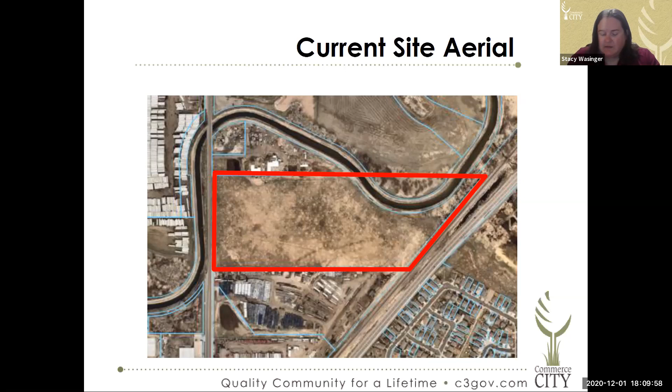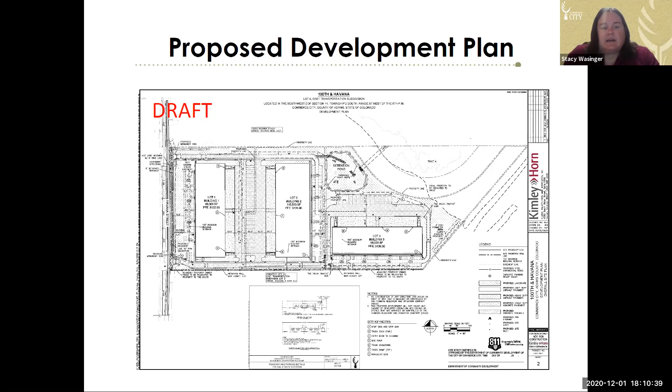So next slide, please.

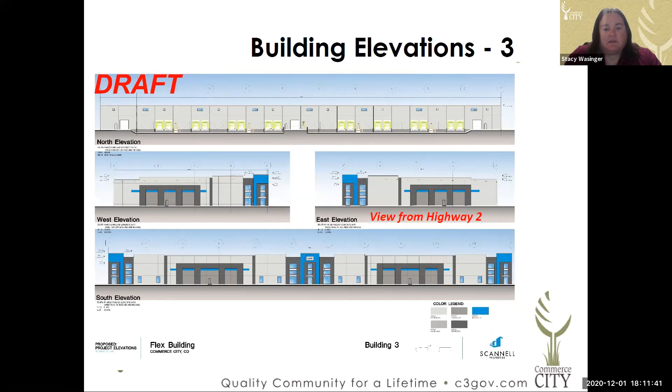And then this is the proposed building 3, and that middle right-hand elevation is the side of the building that would be the east elevation facing Highway 2. Next slide, please.

Based on the DRT analysis, the DRT believes the rezoning is justified to remove the conditions, as well as to rezone that portion to public. Similar conditions were common at the time, but current development processes and standards are more robust than they were in 1995. With the current LDC and development plan process, some of those conditions are a little redundant and create more uncertainty on the developer side by extending that process through planning commission and city council rather than an administrative review.

In those four conditions, as mentioned earlier, the first one deals with a buffer that's part of the lot 1 and 2 development. Lot 4 will be required to meet LDC requirements for landscaping and buffering, which are fairly robust.

Conditions 2 and 3 require planning commission and city council to review and approve the initial development plan, and then any changes to it, which just adds additional time when we have a very robust development plan review process that can ensure all LDC and I2 requirements are met.

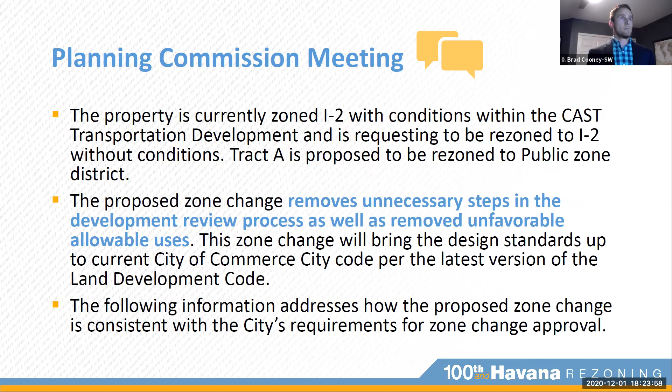Consistency with the comprehensive plan: future land use for the area, as Stacy mentioned, is industrial, which is consistent with the proposed use. Future land use for Tract A is shown as park. We are not proposing any development on Tract A as part of this project, and we'll be dedicating it as public space. Next slide.

Compatibility with surrounding land uses: as the vicinity map showed, the majority of the developments on the south and west side are industrial. To the north is the First Creek Dog Park, which is compatible and aligns with Tract A being dedicated as public, with future land use as park. Next slide, please.

There are no negative impacts to public services, including water, sewer, storm, and streets. Industrial developments such as this are typically low water users and thus generate low sewer flows. Stormwater will be in compliance with Commerce City and Mile High Flood District standards. As part of this development, a public improvement agreement is required, including improvements to existing Havana Street.

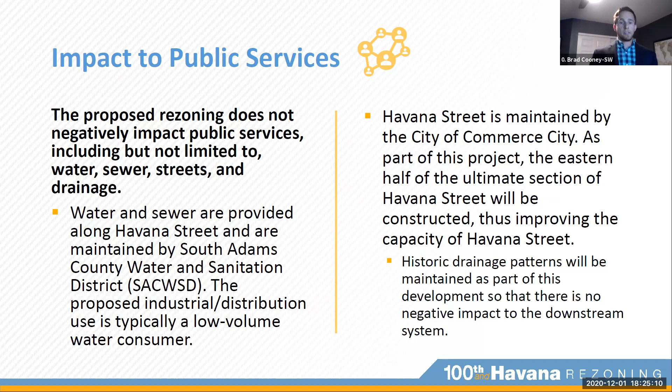There are no negative impacts to public uses, including parks, schools, and open space. Dedicating Tract A as public zone actually enhances the existing First Creek Dog Park.

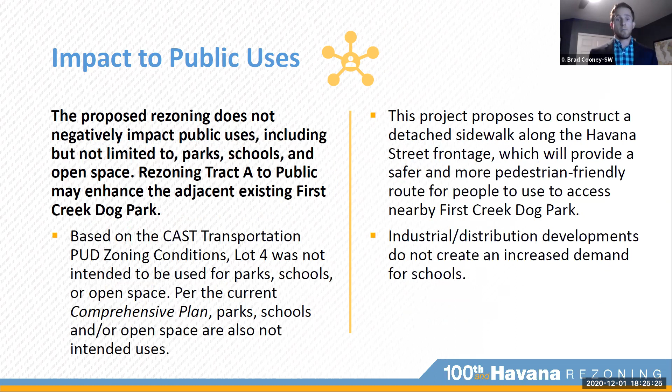Community compatibility: as previously discussed, this development is compatible with surrounding land uses and benefits the community by removing undesirable allowable uses from the CAST Transportation zoning conditions. Ultimately, this development is in the public's interest. Rezoning to I2 without conditions also simplifies the development process and aligns with the comprehensive plan and future land use.

And this basically just sums up all the points that we had previously made. So at this time, I'd like to open up the floor for any questions.

Brad, what was your thought process in your overall development scheme to accommodate the O'Brien Canal? The thought process was understanding that there are no impacts. We're not allowed to develop near the O'Brien Canal or up against it. Understanding that FRICO has specific requirements that we'll need to meet, so trying to best make the site work while still keeping the O'Brien Canal active and not negatively impacting it.

Was there quite a bit of discussions with them, or did you just follow their design guidelines? Oh no, quite a bit of discussions, and these discussions have been going on for the better part of 8 to 10 months at this point. Okay, yeah, we kind of figured that would probably be the case.

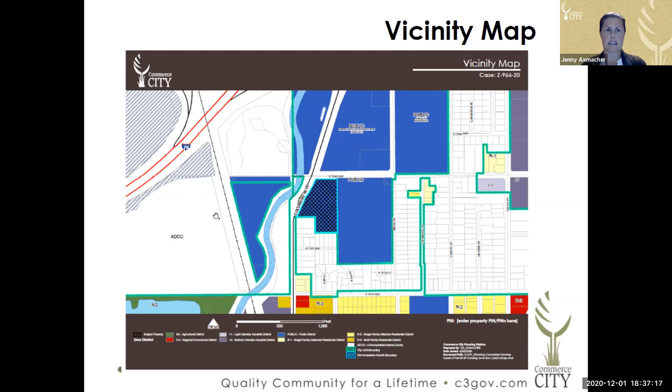Thank you very much. Good evening, Mr. Chairman and members of the Planning Commission. I'm excited to present case Z-966-20 to you. The address is 7190 Colorado Boulevard. The applicant is the Urban Land Conservancy, and the request is to rezone the site from public to PUD, planned unit development. The site is located at 72nd Avenue and Colorado Boulevard, with 72nd Avenue to the north and Colorado Boulevard to the west. In the surrounding area, to the north we have an Adams County service building, home of the Adams County Communications Services Center and a sheriff's substation, zoned public. To the east, we have the Alsup Elementary site, zoned public. To the south, we have unincorporated residential properties in Adams County. And to the west, it's exciting to point out we have the newly opened RTD 72nd Avenue N Line station, also zoned public. The comprehensive plan for this site designates it mixed use, corridor, and commercial. There's also a station area master plan that has been done for this area adjacent to the transit center.

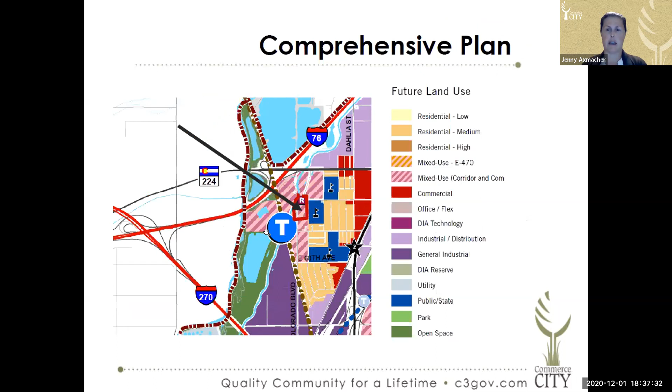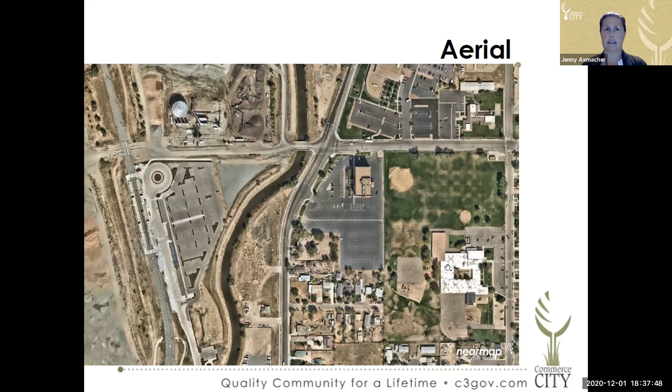So here's an aerial of the site. It's currently developed, the former home of the Adams County Human Services building that was recently relocated. It's developed with parking. Here's the station I mentioned just to the west, the Alsop Elementary site, and the Adams County site to the north.

The history for the site: it was rezoned to Public in 1989, and was the former site of the Human Services location. So the request tonight is to rezone this site from Public to PUD to allow for a wider variety of uses in support of transit-oriented development.

They're proposing two planning areas within this PUD, Planning Area A and Planning Area B. Within Planning Area A is the existing office building. They're proposing changes to the zoning that would allow more varied office and commercial uses, including those uses permissible in the C2 General Commercial Zone District, in addition to those already allowed in the Public Zone District.

For Planning Area B, they're allowing a more dense multifamily residential use, 60 dwelling units total, based on the R3 Zone District. The density is greater than what would be allowed in the R3 Zone District, and it also allows for accessory commercial uses.

The DRT is supportive of this proposal and believes that the expansion of the allowed uses and increased residential density will allow the site to more appropriately take advantage of its proximity to the 72nd Avenue station.

So they're proposing some revised bulk standards as part of the PUD zone document, including an increase in building height for the residential development by 5 feet. We believe the station area master plan and transit-oriented development feel is supported by this, while the Public Zone District allows for 80-foot high buildings. The 55 feet that would be allowed in the residential portion of this site would actually be smaller than what would be allowed otherwise.

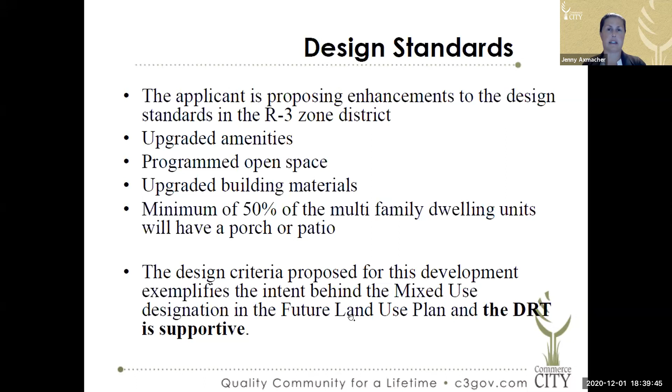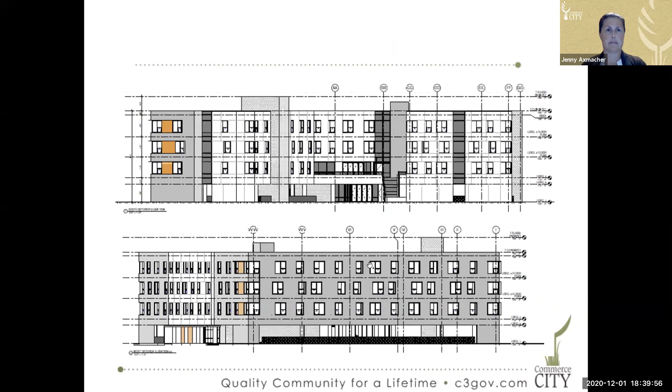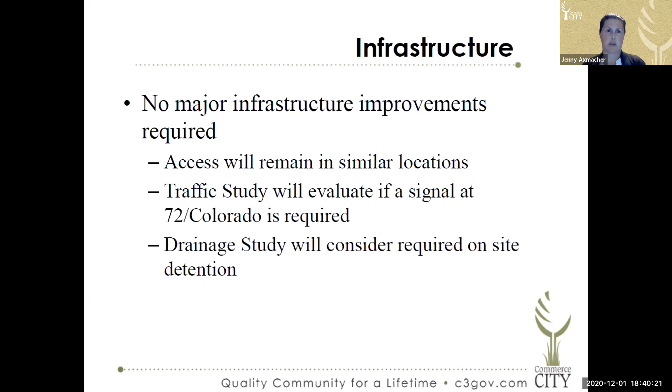So no major infrastructure improvements are anticipated. Access will remain in similar locations. The traffic study will evaluate if there are any additional requirements, considering whether a signal would be required at 72nd and Colorado Boulevard. It's important to note that Public Works did just complete some improvements along Colorado Boulevard in advance of that RTD station opening. And a drainage study for the project will consider whether any on-site detention will be required.

As of this date, staff has not received any inquiries from the public regarding this request. And while I neglected to include a slide, I can assure you that the notice requirements outlined in section 21-3285 were met. This property was posted, the notice was published, and the adjacent property owners were also notified.

So the DRT believes this case meets the approval criteria for rezoning to PUD, including compatibility with the future land use plan, both the comprehensive plan and the station area master plan, that it represents an improvement in quality over what could have been accomplished through strict application of the zoning code, and that it's compatible with the surrounding area. The DRT recommends that the Planning Commission vote to forward this request to council with a favorable recommendation.

With that, staff is happy to answer any questions, and then I'd be happy to introduce the applicant. Thanks, Jenny. Questions for Vice Chairman Amador?

So it looks like this is a 4-story building. And on that curve that's there, what does the traffic study say in terms of access and volume? Because I have a feeling there's going to be a lot of collisions and increased traffic going on here.

I believe the traffic study hasn't been finalized, but it will evaluate whether that access can remain in that same location or needs to be adjusted to prevent those issues. Okay, that helps. Thank you.

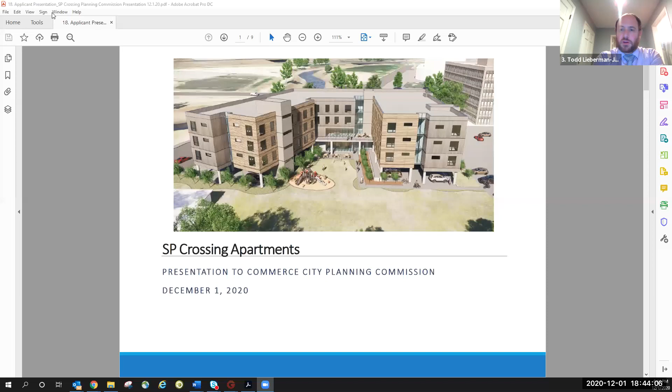Very excited about this project, streaming at you live from Kansas City. Brinshore Development is a national development company, and we are partnering on this development with Nesbitt Development, a local Colorado-based development company, in partnership with the Urban Land Conservancy. This development is a really exciting opportunity to build affordable housing near a transit station in Commerce City.

You can see a shot of the site, which includes a 4-story building with a podium of parking. So 4 total stories, one of which is parking, and also on the first floor is the lobby and some amenity space. There's a nice courtyard area with a playground, and the units will be priced at all sorts of different rents, from housing affordable to people under 30% of the area median income, all the way up to 80%, which is more or less market rate.

Parking is under the building, and there's some shared spaces adjacent to it, but we hope a lot of residents will use the RTD station nearby. We're working with a great architect locally and a great civil engineering firm on this, and are excited about moving this project forward.

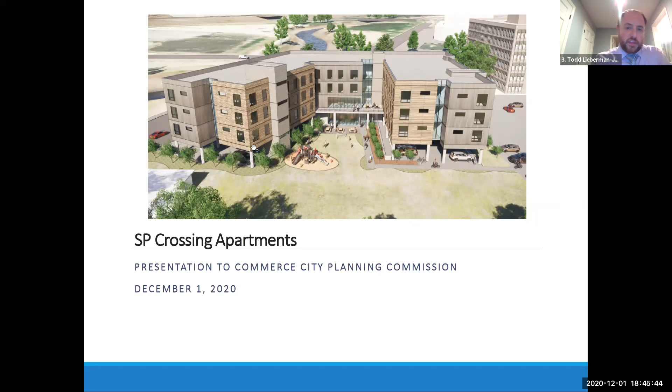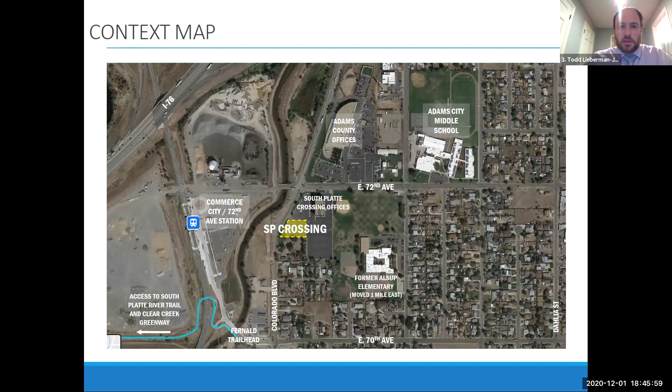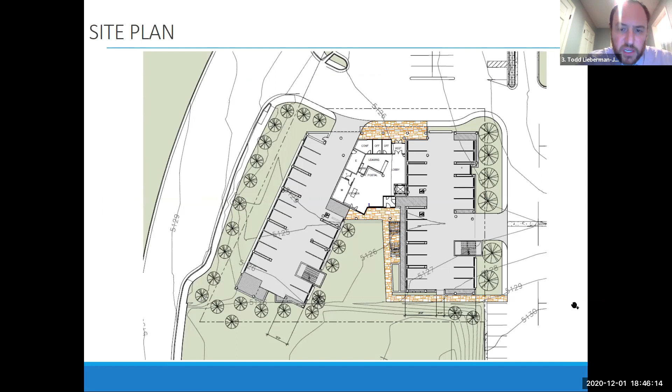This is the first floor plan, showing the parking as well as the amenity space and leasing office. There'll be a nice amenity space that goes up between the first and second floors.

Here's the shot you saw before, showing the amenity space opening up into the nice courtyard. Brinshore develops projects like this around the country. We currently have 2 developments in Denver, one a few blocks from the Capitol building called Capitol Square, which just broke ground, and Sheridan Station in the city of Denver. So this is our 3rd entree into the Denver region.

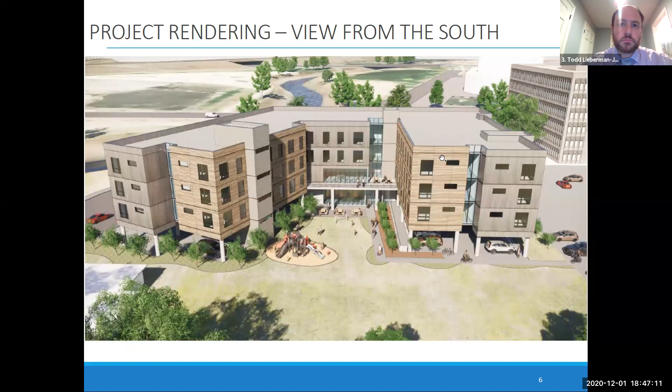We are joined today with our civil engineer and with the Urban Land Conservancy, who may have some additional points to add here. If not, thank you for your time, and we're available to answer questions.

Thank you, Mr. Lieberman. Questions from the commissioners? Thank you, Mr. Lieberman, no further questions, I think, from our side on that. We'd now like to open up our public comment portion of it.

I think we have Mr. Douglas registered as well. Mr. Douglas, questions? Yes, I have a few here.

I know parking was a concern. Looking at the picture of the development, how it faces to the south, there are 2 current residential properties now, 7110 Colorado and 7090 Colorado. Is there any way that land can be purchased, if they're willing sellers, for those lots next to said apartments? Because that's 4 stories high, that's a lot for that little residential lot.

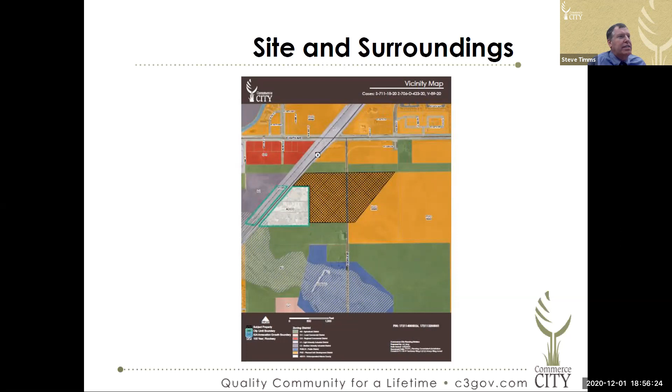The future land use plan here identified shows that area of orange, if you will. That's medium density residential in our plan.

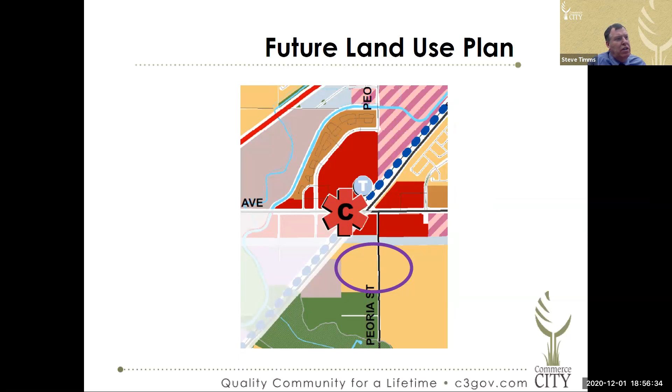A little history on this site: this property was annexed into the city back in 1998, at which time it was zoned R1 single family. In 1999, Turnberry created their PUD for this development, and as they began platting and entitling their entire development. Most of Turnberry right now you're familiar with is on the north side, where the Starbucks is, and then Turnberry Elementary all the way up to 112th to the new rec center. That's all Turnberry, but they also own some holdings to the south, and that's what this area is. Up until now, the south side has remained vacant, but now they are ready to start developing that.

This is just showing the proposed development on a large scale. What you see is that diagonal road, that's the new Peoria Parkway, the new realigned Peoria. On the very bottom of your screen there on the south entrance, that's where it would line up with the existing right-of-way. And then up on the northeast is where it would hit up with Revere Street, by the Nativity Lutheran Church and the RTD Park and Ride.

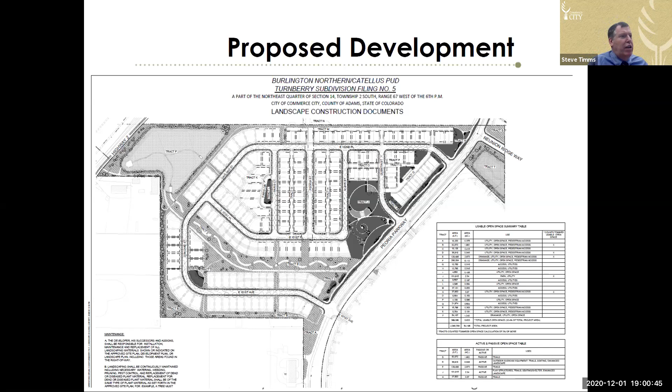Next slide, please. So this is taken from their vacation plat, but it just shows the piece of Peoria that would be vacated, because right now it kind of goes right through filing number 5. And then you'll see that it would be realigned to the east and then hooking up with Revere at 104th.

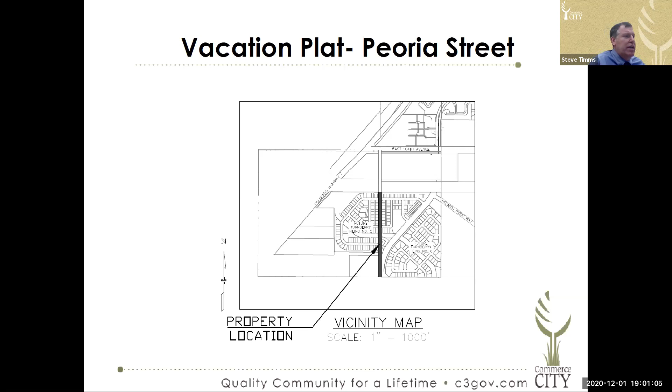So part of it is if you look where Peoria Street would hit 104th, it's basically right there at the Highway 2 intersection. We have all these diagonal intersections in our city that create some traffic issues. That's one of the main reasons, not the only reason, but that's one of the main reasons to get that off that alignment. And then it can provide a nice collector street throughout the entire development.

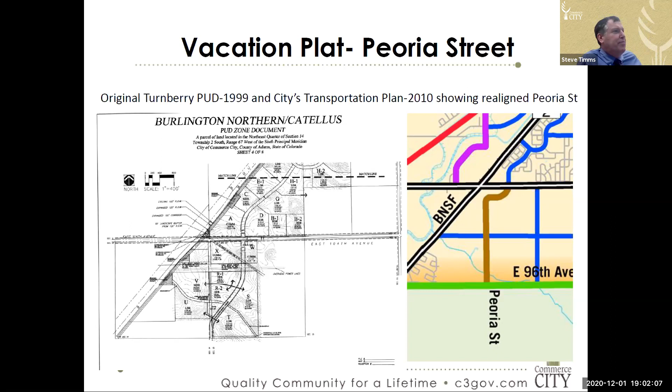Next slide, please. So the vacation plat has to be approved first, because you can't plat over a right of way. So the vacation plat motion would have to go first before the subdivision, but the DRT is supporting it. As I mentioned, the comprehensive plan and transportation plan call that realignment out. It also helps to signal that there's continued growth and construction occurring in the Northern Range.

That particular area between Turnberry and Reunion Ridge has remained vacant basically since the development of the city. That's one reason when, especially, commercial developers come up and they see a lot of vacant land like that, they feel the market's not quite mature enough. So this will help to fill in some of those holes, if you will, that occur in the Northern Range. And it also does help create a strong collector road network through the development, both north and south, and provides good identification and good continuity for all of Turnberry.

And again, all the existing utilities in that area have been in coordination with the developer and are ongoing. Next slide, please. So there is approval criteria in the Land Development Code found in the exact verbiage found in your packets. This is just a summary, but it has been found to be in compliance with the approval criteria found in the Land Development Code.

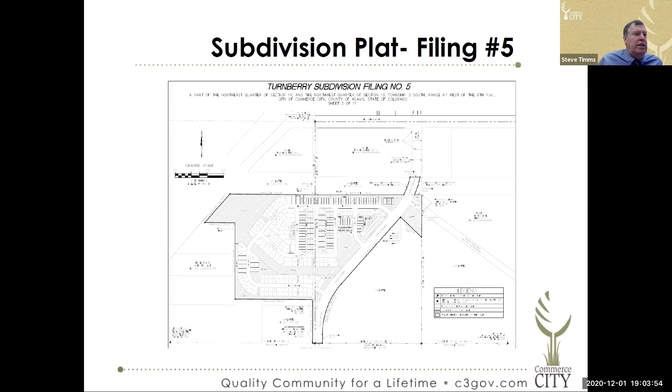Next slide, please. So this is taken from the Turnberry filing 5, which basically calls out the different lots and different tracks, and also dedicates the right-of-way, both Peoria Parkway, but also the collector and local roads as well to the city.

Next slide, please. So as part of the subdivision plat, again, it's been reviewed against the Turnberry requirements and the city subdivision standards, and does meet those. It has been reviewed and referred out to different agencies, including the school district, utility companies, the fire district, Mile High Flood Control, Tri-County, internal city departments, and those issues and comments have been worked through.

Next slide, please. So the DRT is supporting this consolidation plat. It is consistent with the city requirement for the size and the layout. Again, it shows the continued growth and economic strength in the local economy, which helps to entice future retailers to the area. And it does help to implement the community vision, which was basically desiring single-family detached and attached homes in the area that have been called out specifically for that type of use going back 20+ years.

Next slide, please. So again, with the subdivision plat, there is criteria found within your packet, the exact verbiage. This is a summary, but the DRT did find that this was in compliance with those approval criteria. Next slide, please.

So there is one condition. Within Commerce City, within our charter and our land development code, subdivisions are approved by resolution by City Council, which requires 1 reading. Vacations require, they're an ordinance, they require 2 readings. So there's one condition which basically says the subdivision plat is based on the final approval of the vacation plat. If for some reason the vacation plat is not approved at second reading, then the subdivision plat becomes null and void. We don't want lots to occur over an existing right-of-way.

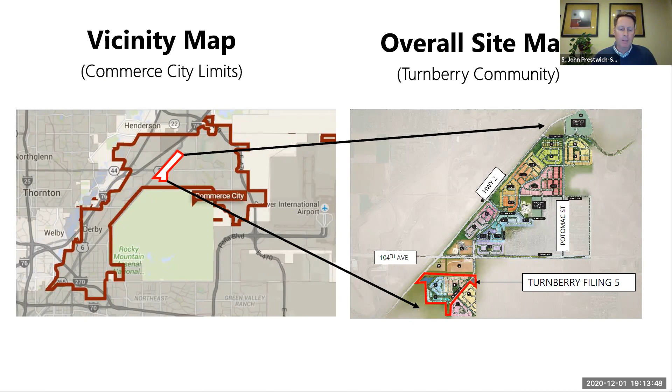Trying to put it in context, we've got a vicinity map highlighting the entire Turnberry community within Commerce City. On the right-hand portion of the slide, we have an overall site map highlighting Filing 5 in red, which is the next phase of the Turnberry community. It's located south of 104th, east of Highway 2, and west of the new Peoria alignment. Next slide, please.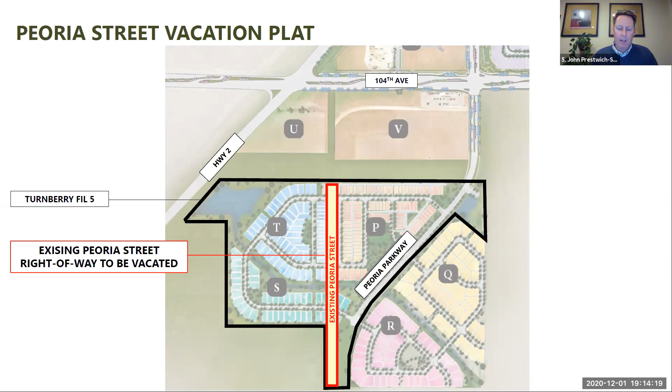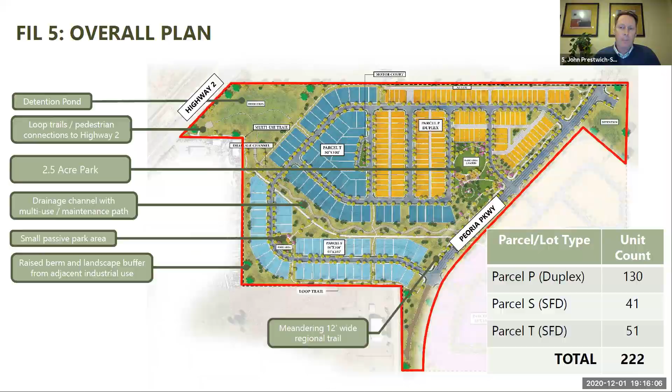If we could move to the next slide, please.

Final slide, please.

So I promised to keep it pretty brief. In conclusion, this proposal meets or exceeds all of the PUD requirements as well as the design standards in the city's land development code. It's a logical next phase for the exciting Turnberry community. And with that, I just want to thank you for your time this evening. We are here and available for questions, and Michael Kirkendall with Catellus is with us as well. So thanks again.